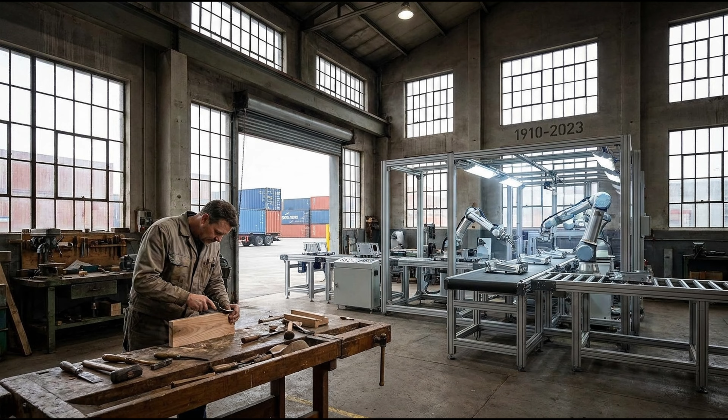The transformation of manufacturing from localized artisanal craftsmanship to globalized automated mass production stands as one of the most consequential economic and technological developments of the modern era. Prior to the Industrial Revolution, the fabrication of complex goods was fundamentally a bespoke, labor-intensive process, relying heavily on the individual expertise of skilled craftspeople. Individual artisans would meticulously shape, fit, and assemble components by hand, using simple tools, resulting in products that were entirely unique, expensive, and devoid of the consistency required for broad commercial distribution.

Early glimpses of sequential production emerged as early as the 12th century at the Venetian arsenal, where laborers produced ships by moving them down a canal, fitting new components at each designated stop to achieve a remarkable output of one completed ship per day. However, the true conceptual foundation for modern manufacturing was laid with the advent of interchangeable parts.

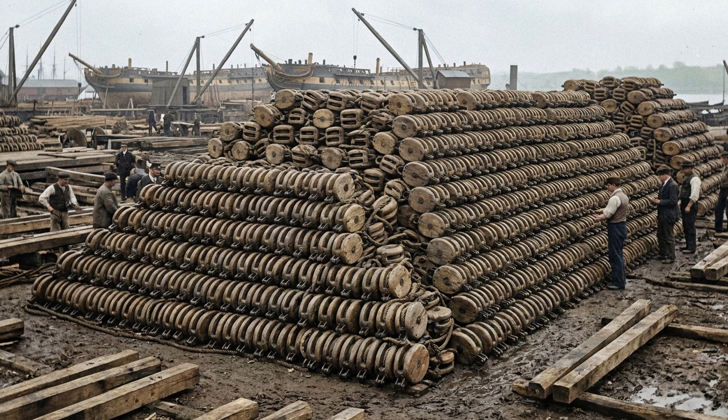In the late 18th century, French gunsmith Honoré Blanc championed the use of standardized firearm components, though his ideas faced resistance from fellow artisans protecting their custom trades. Concurrently, English naval engineer Samuel Bentham applied uniform parts to the production of wooden ship pulleys, but it was Eli Whitney who successfully popularized the concept in the United States, utilizing standardized equipment and unskilled labor to manufacture firearms at scale. These historical precedents coalesced at the dawn of the 20th century to revolutionize the automotive industry.

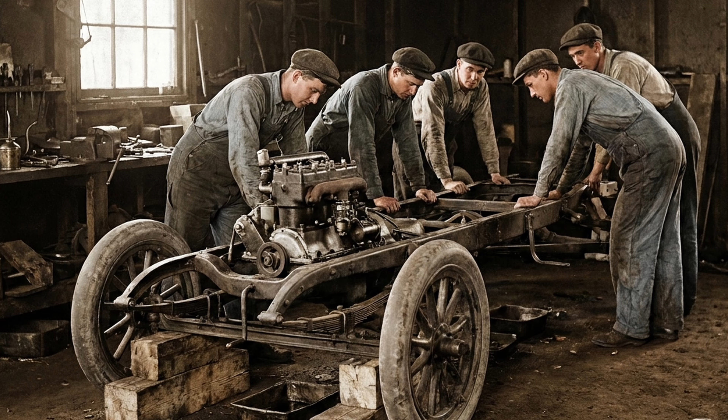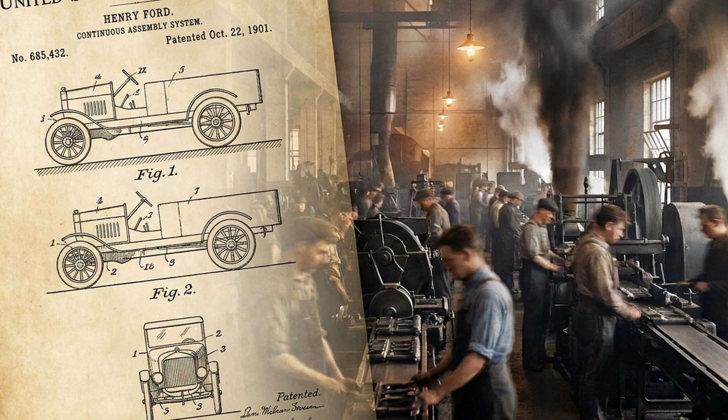In the early 1900s, automobile chassis were typically placed on stationary blocks, and workers carried materials to the cars to assemble them one at a time, making vehicle ownership a privilege strictly reserved for the wealthy. In 1901, Ransom E. Olds patented the first automotive assembly line for his curved dash Oldsmobile, enabling his factory to turn out an unprecedented 20 units per day and increasing overall output by 500% within a single year.

Building upon Olds' methods, Henry Ford introduced the moving assembly line at the Ford Motor Company's Highland Park plant in 1913, utilizing heavy steel rails and motorized conveyor belts to tow the vehicle chassis from station to station. By strictly dividing labor into discrete, repeatable tasks and enforcing a sequential organization of tools and personnel, Ford achieved a staggering increase in efficiency, reducing the assembly time of a single Model T from over 12 hours to a mere 93 minutes. This innovation democratized the automobile, slashing prices and fueling the massive economic prosperity of the 1920s.

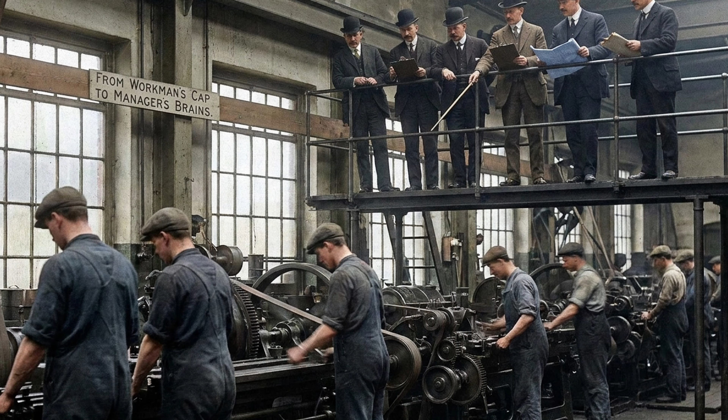However, the extraordinary productivity gains of the early 20th century assembly line exacted a severe and unsustainable human toll. The implementation of scientific management principles effectively stripped the deep, multifaceted knowledge of the skilled artisan from the factory floor, replacing refined mental and manual skills with simple, monotonous tasks repeated endlessly. The comprehensive understanding of the manufacturing process was transferred from the workman's cap to the manager's brains, relegating the human operator to a mere biological extension of the machinery.

Workers were tethered to the relentless machine-driven pace of the line, performing isolated operations such as securing a specific bolt or applying a single weld hundreds of times per shift. This environment fostered extreme boredom and psychological degradation, requiring only minutes of training before a novice was expected to automatize their movements to keep pace with the mechanized belt.

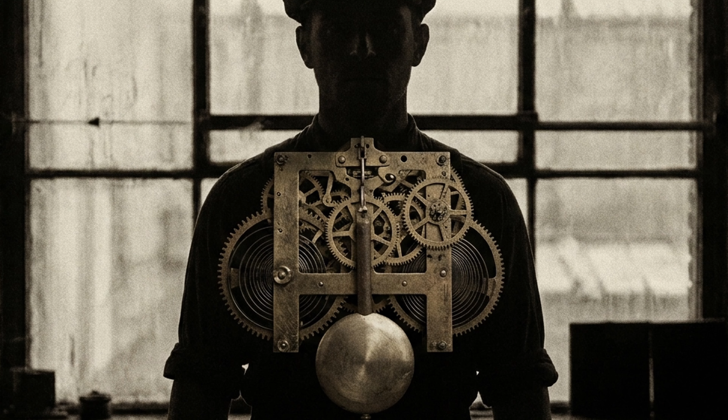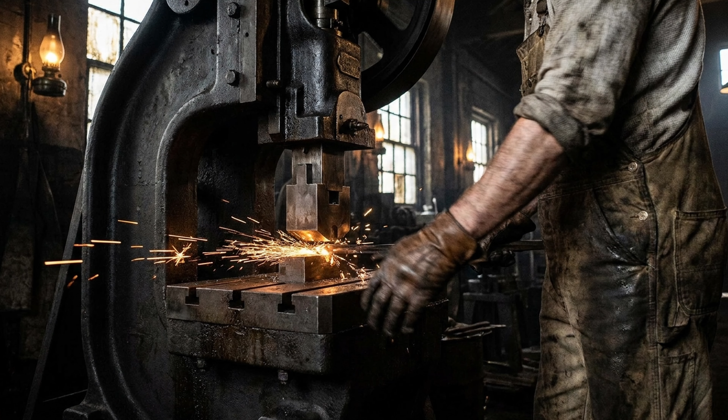The physical demands were equally brutal. The assembly line itself became an unyielding machine boss, operating at terrifying speeds that forced workers to push their physiological limits continuously. Factory managers frequently employed speed-up tactics, arbitrarily accelerating the conveyors alongside stretch-out strategies that doubled up machine assignments to ensure workers were never idle. The resulting work environment was characterized by unbearable line speeds and severe occupational hazards, where laborers operating milling machines, lathes, and punch presses frequently risked catastrophic injury and amputations.

This punishing regime heavily favored the physical resilience of youth. By the time workers reached their late 30s or early 40s, many were physically burnt out and unceremoniously discarded onto the industrial scrap heap by personnel managers who refused to hire older individuals. Despite the famously high wages offered by Ford's $5 plan, the extreme physical exhaustion, the profound psychological monotony, and the rampant exploitation of immigrant labor rendered the human element the most vulnerable and volatile link in the manufacturing chain, frequently leading to a drop in quality, output, and widespread worker dissatisfaction.

Simultaneously, the automated machinery that populated these early factories, while incredibly fast, suffered from severe mechanical rigidity. The pinnacle of early automation was the cam-driven automatic lathe, a technology originating from designs pioneered by Swiss engineer Jakob Schweitzer in 1872 and heavily utilized throughout the 1920s and beyond. These machines relied entirely on fixed physical geometry to govern motion, utilizing a central rotating camshaft. As this main shaft turned, specially profiled metal cams mechanically pushed and pulled an array of levers, linkages, and up to 6 simultaneous tool slides.

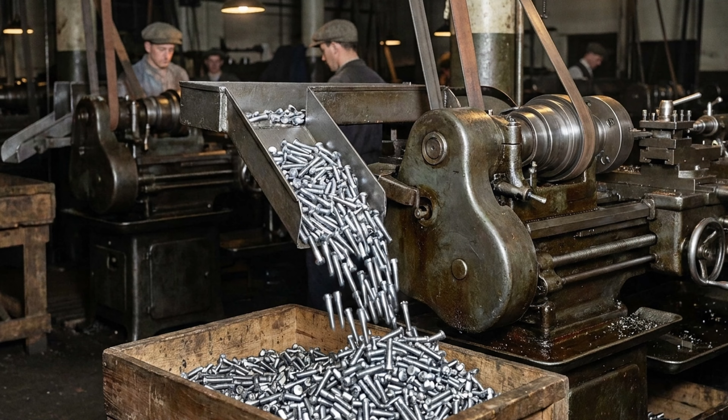The precise physical shape of the cam dictated the exact moment a cutting tool would feed into a bar of raw metal, how deeply it would cut, and when it would retract to allow the part to be parted off. This pure mechanical automation was capable of extraordinary speed and consistency, operating continuously 24 hours a day and completing machining cycles in mere seconds without any manual intervention during the cycle.

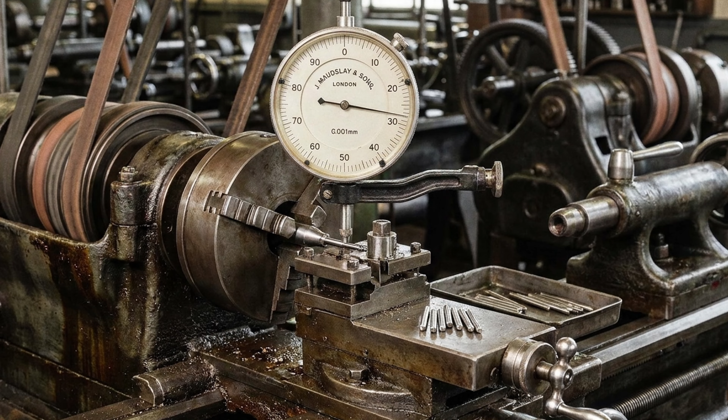Because the motion trajectory was mandated by solid steel rather than vulnerable electronic signals, these machines were immune to network interference, servo response fluctuations, or software glitches, guaranteeing exceptional dimensional consistency with tolerances around plus or minus 0.02 of a millimeter for the mass production of uniform items like screws, pins, and standardized fasteners.

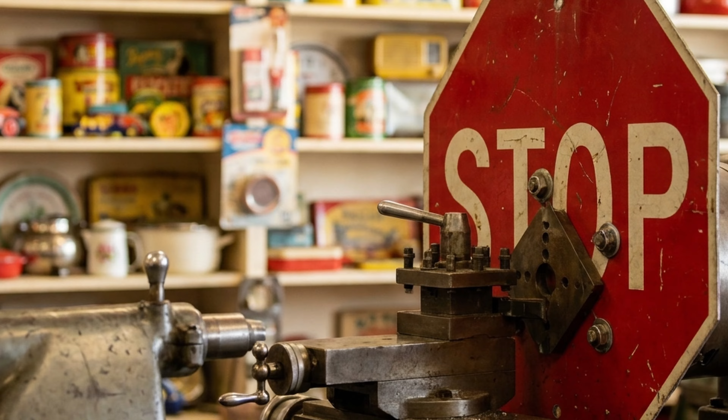Yet this mechanical genius was fundamentally inflexible, representing a massive bottleneck in the face of evolving consumer demands. The geometry of the machine was entirely hard-coded into its physical components. If an engineering design changed, or if the factory needed to produce a differently sized component, the entire machine had to be halted. Technicians were required to physically remove the heavy steel cams and machine entirely new ones with different mathematical profiles, an expensive and time-consuming retooling process.

The automated lines of the 20th century were magnificent instruments of rigid mass production, highly effective for producing millions of identical parts, but entirely incapable of mass customization or rapid adaptation. As global consumer demand began to fracture into thousands of different preferences, requiring factories to switch rapidly between different car models, varying electronics, and customized appliances, the hard-coded mechanics of cams, gears, and synchronized drive shafts became an unsustainable limitation.

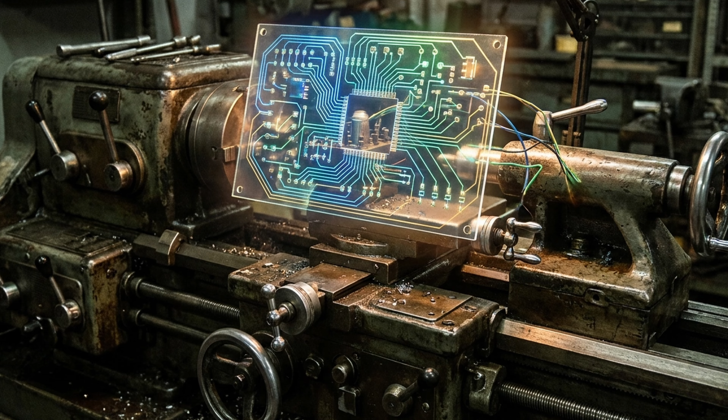A disruptive shift was desperately required to decouple physical motion from fixed hardware, paving the way for the era of programmable digital flexibility and the rise of the articulated robotic arm. The liberation of the industrial assembly line from the tyranny of fixed mechanics began with the conceptualization of the programmable transfer machine, marking the dawn of the robotics age.

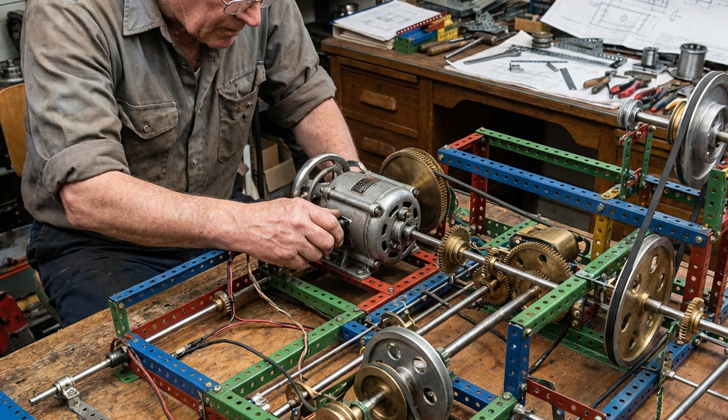The very first known iteration of an industrial robot dates back to 1937, when Griffith P. Taylor constructed a crane-like device utilizing Meccano parts, powered by a single electric motor and capable of automating the stacking of wooden blocks through pre-programmed patterns.

However, the true commercial genesis of the industry occurred in 1954, when George Devol, widely recognized as the father of robotics, filed the first industrial robot patent. Partnering with Joseph F. Engelberger in 1956, Devol formed Unimation, the world's first company dedicated to producing industrial robots.

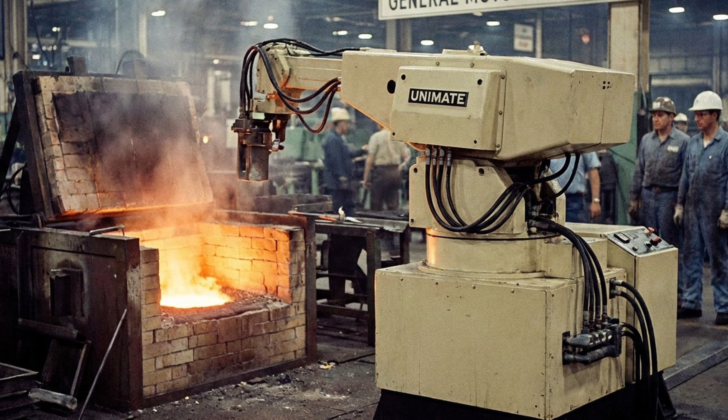In 1962, Unimation initiated the robotic automation of the automotive industry by installing the Unimate robot at a General Motors die-casting plant in New Jersey. These early iterations were primarily utilized for material handling and spot welding, transferring objects within a limited radius of 12 feet. While effective at removing human workers from hazardous, high-temperature environments, these early iterations lacked the fluid dexterity required for complex assembly tasks.

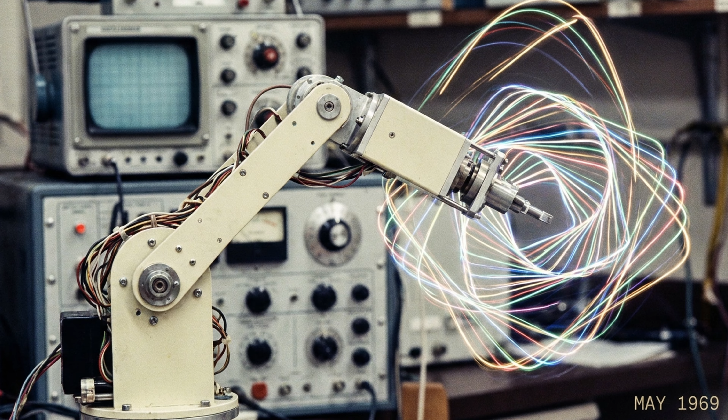The architectural revolution in manufacturing kinematics arrived definitively in 1969 with the invention of the Stanford arm by Victor Scheinman at Stanford University. As the first all-electric, six-axis articulated robotic arm, the Stanford arm introduced an unprecedented level of dexterity and spatial control, expanding the role of robotics far beyond simple material transfer into the complex realms of intricate assembly and continuous path arc welding.

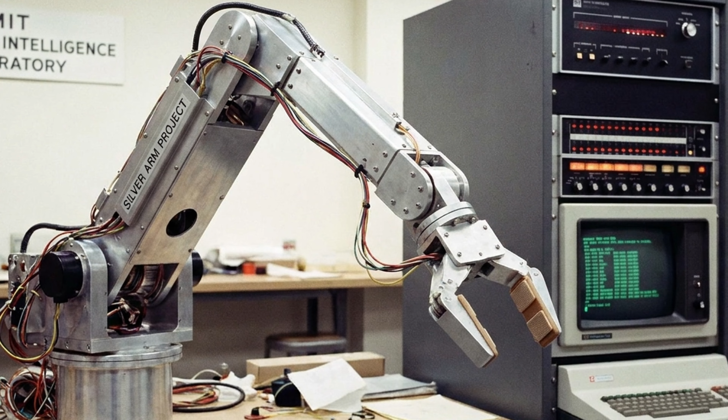Scheinman continued his pioneering work at the Massachusetts Institute of Technology, developing the Silver Arm in 1974, which utilized touch and pressure sensors for feedback control via a mini-computer. He subsequently founded VicArm to manufacture these designs, eventually selling the technology to Unimation, leading to the collaborative development with General Motors of the Puma robot in 1978, which became a ubiquitous fixture in modern assembly line production.

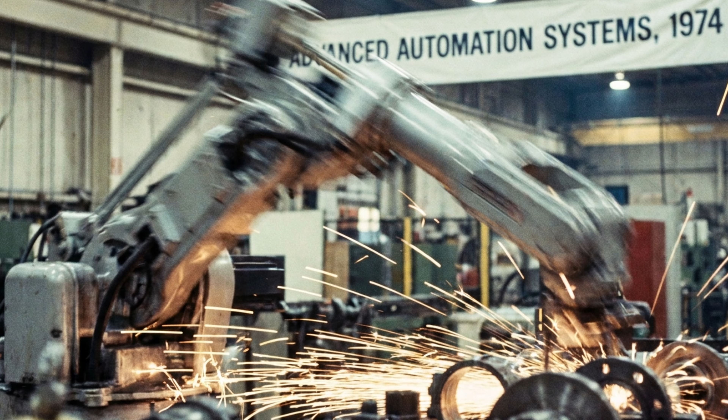The absolute mastery of the modern industrial robot lies in its mechanical architecture, which is specifically designed to replicate and vastly exceed the biomechanics of the human arm. This superlative dexterity is achieved through 6 distinct degrees of freedom, allowing the machine to navigate 3 linear dimensions, x, y, and z, and 3 rotational orientations, roll, pitch, and yaw.

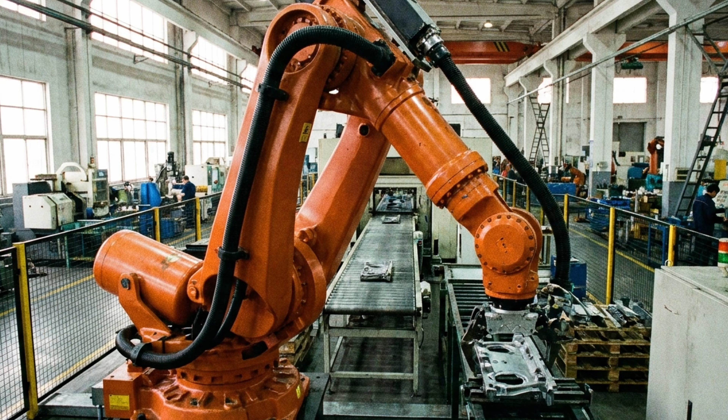The physical structure begins at the robust robot base, which houses the main power conduits, the main control unit, and securely anchors the massive machine to the factory floor. The first axis operates at this base, providing a sweeping side-to-side rotational movement. This joint powers a rotation range that frequently spans greater than 180 degrees from the center point, defining the breadth of the robot's primary work envelope and allowing it to access components situated completely behind its core body.

Above this foundation, the second axis acts as the primary shoulder joint, powering the heavy forward and backward extension of the entire lower arm linkage. The third axis functions as the elbow, raising and lowering the upper arm to dictate the vertical reach of the machine.

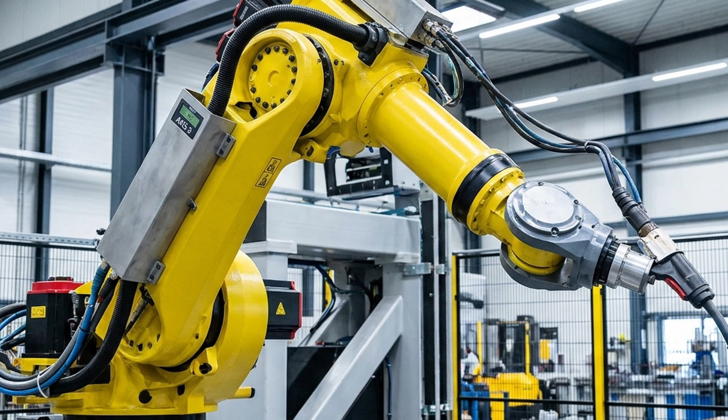In highly articulated models, this joint permits the arm to reach back over itself, drastically expanding the accessible geometric workspace. The true finesse of the 6-axis architecture, however, is localized in the complex wrist mechanism, which comprises the final 3 degrees of freedom.

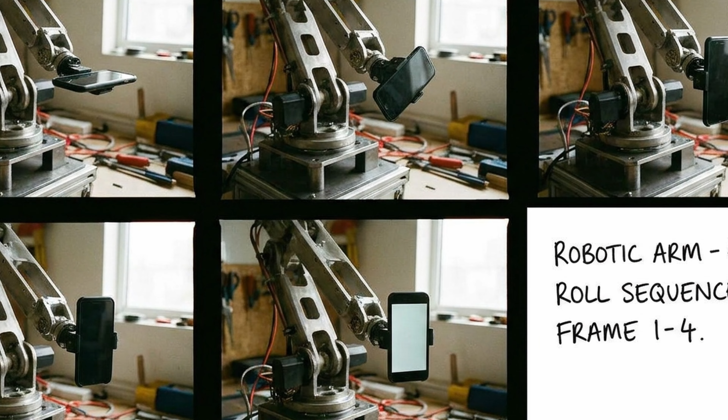The fourth axis rolls the upper arm in a continuous circular motion, reorienting held parts from horizontal planes to vertical alignments, commonly referred to as the wrist roll.

The fifth axis dictates the pitch and yaw, functioning much like a human wrist tilting up and down or swinging side to side on a mechanical hinge.

Finally, the sixth axis rotates the end effector, the specialized tooling attached to the robot, such as a welding torch, pneumatic gripper, or suction array, in a twisting motion that frequently exceeds a full 360 degrees in either a clockwise or counterclockwise direction, a physical feat entirely impossible for human anatomy.

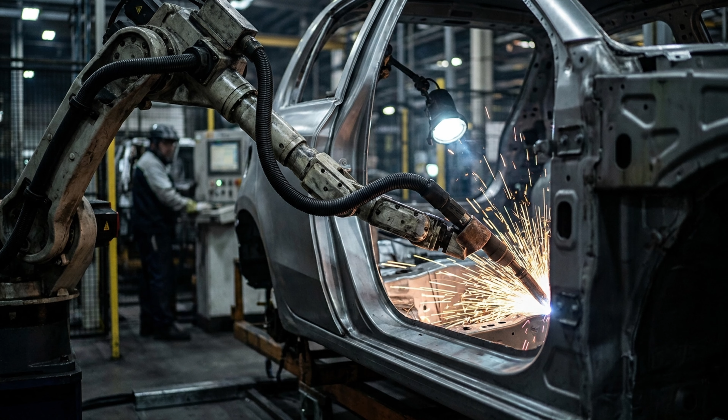This compounding series of joints enables the robot to snake into the confined, structurally complex chassis of an automobile to execute a spot weld in a geometrically restricted space, or to approach a delicate electronics casing from an acute angle without disturbing adjacent microscopic components.

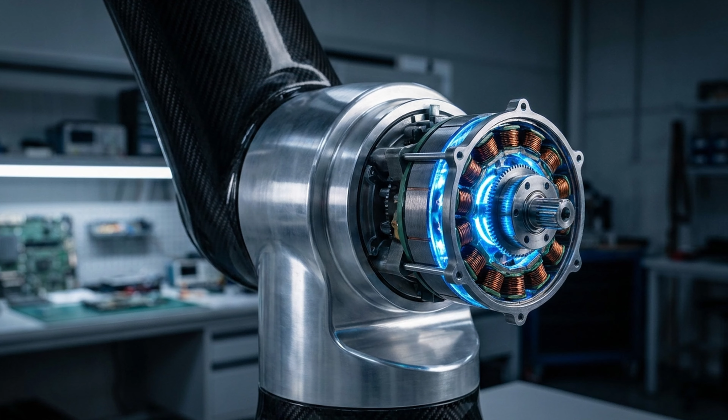Powering these sophisticated sequences of articulation are high-torque servo motors, which serve as the indispensable muscular system of the robotic architecture. Unlike standard induction motors that run continuously at a constant velocity, a servo motor is a highly specialized actuator designed explicitly for exact positional control, velocity regulation, and rapid, powerful acceleration.

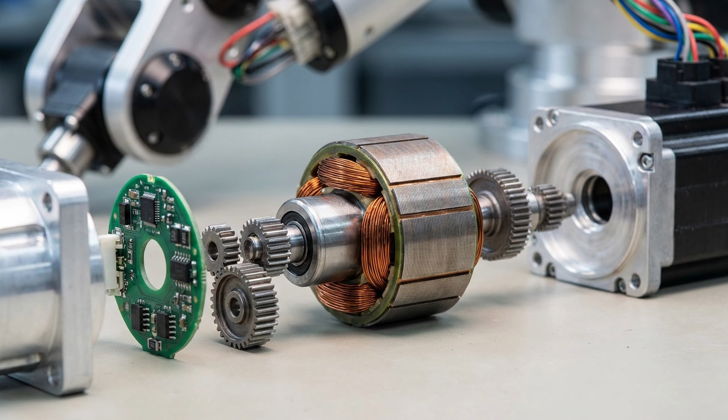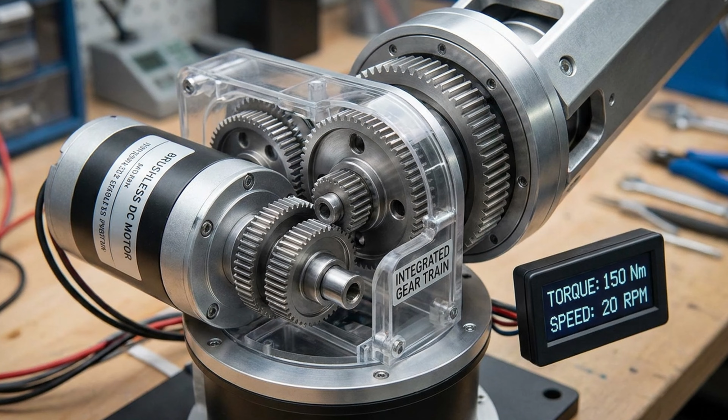The internal anatomy of a servo motor consists of a direct current or alternating current electric motor, a complex gear train, a precision feedback sensor, and a dedicated control circuit. The motor generates the raw rotational motion, while the integrated gear train reduces the motor's high-speed output to vastly increase the torque, enabling the robotic arm to manipulate heavy payloads without sacrificing delicate accuracy.

To achieve the near-zero backlash required for micrometer precision, modern servo motors frequently utilize advanced strain wave gear technology, which minimizes efficiency losses and ensures that when the motor halts, the massive kinetic energy of the robotic limb ceases instantly with zero mechanical slop or vibration.

The fundamental distinction and primary advantage of the servo mechanism is its integration into a highly responsive closed-loop feedback system. Embedded directly within each of the 6 joints is a high-resolution optical or magnetic encoder, or a precision position potentiometer, that continuously measures the absolute rotational position, speed, and trajectory of the motor shaft.

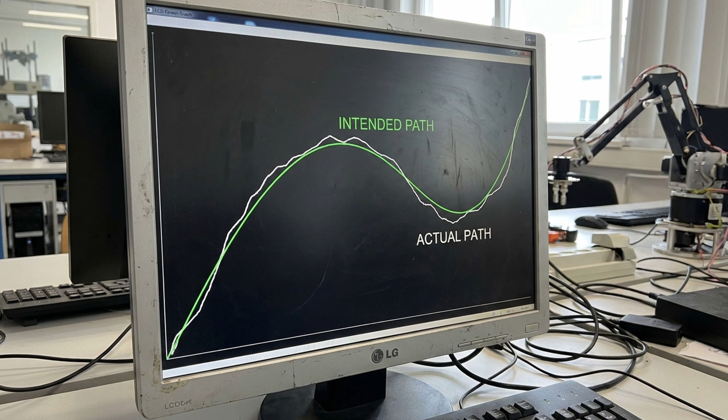This sensor relays high-frequency telemetry back to the robot's central controller, which constantly compares the actual physical position of the robot limb against the mathematically desired coordinate programmed into the software.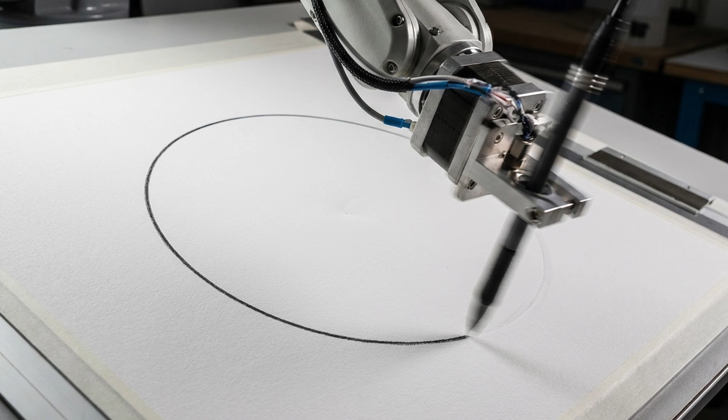If a spatial discrepancy of even a fraction of a degree is detected, the control circuit instantaneously modulates the pulse width modulation signal, injecting precise bursts of electrical current to adjust the motor's motion and correct the trajectory in real time. This continuous microsecond-level cycle of measurement, comparison, and correction is what grants the 6-axis robot its fluid, superhuman precision.

In complex manufacturing tasks, such as continuous path robotic arc welding, the robotic arm must maintain the welding torch at an exact, unwavering distance and angle relative to the curvature of the metal, moving at a strictly regulated velocity to ensure the molten weld pool forms evenly without burning through the base material.

High-torque servo motors provide the immense rotational force necessary to maneuver heavy steel armatures, while simultaneously demonstrating the microscopic delicacy required to halt that massive kinetic energy at a specific sub-millimeter coordinate.

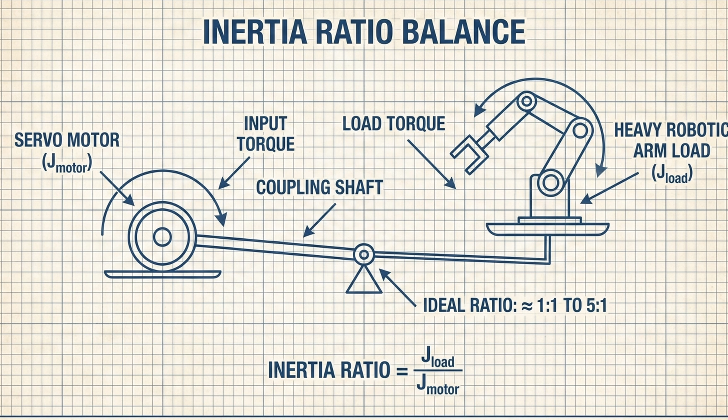Crucially, the selection of these motors requires meticulous inertia matching, ensuring the inertia ratio between the motor and the load falls within an optimal 1-to-1 to 5-to-1 margin, allowing the servo to respond instantly, maintain fluid motion profiles, and avoid unnecessary mechanical stress on the couplings.

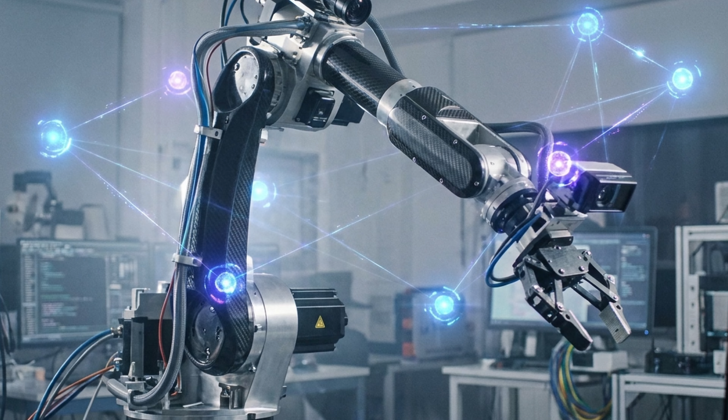Ultimately, this awe-inspiring physical architecture is entirely subservient to the invisible software governing every single millimeter of travel. The transition from cams to code means that the robot's motion profile is no longer a physical artifact carved in steel, but a highly adaptable digital string of waypoints, arrays, and kinematics calculations.

Engineers utilize intuitive teach pendants to manually guide the end effector through a desired sequence, recording the precise angular coordinates of the joints at each step to build an operational program.

Alternatively, offline programming software allows manufacturing engineers to generate complex multi-axis toolpaths directly from 3-dimensional computer-aided design models, translating virtual geometry into actionable servo commands without ever halting the physical production line.

This seamless, instantaneous bridge between digital intent and physical execution is what fundamentally separates modern robotic assembly from its rigid mechanical ancestors, transforming the modern factory floor from a static arrangement of iron into a dynamic, infinitely reprogrammable engine of creation.

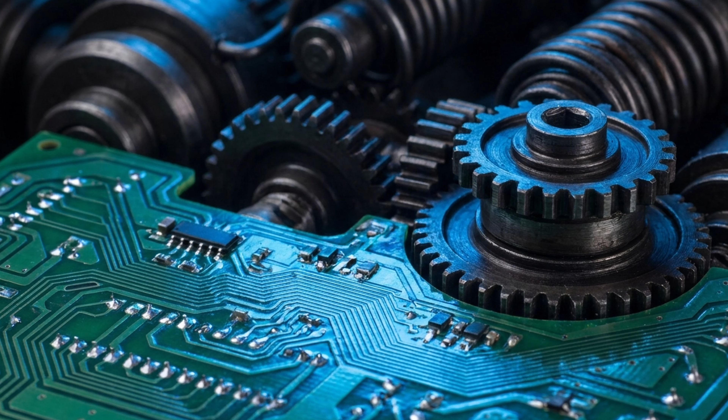While high-torque servo motors and articulated steel structures form the muscle and bone of the modern assembly line, the Programmable Logic Controller operates as the indispensable central nervous system, orchestrating the chaos of the factory floor into perfect operational harmony.

Introduced to the industrial landscape in the late 1960s to replace massive, convoluted, and highly fault-prone cabinets of hardwired electromechanical relays, the Programmable Logic Controller is a ruggedized, industrial-grade computer designed specifically to withstand the severe vibrations, extreme temperature fluctuations, pervasive dust, and intense electromagnetic noise inherent to heavy manufacturing environments.

In its modern incarnation, the controller possesses processing capabilities that rival high-end commercial computers, yet it operates on a fundamentally different computational paradigm that prioritizes absolute determinism, long life cycles, and unwavering real-time reliability.

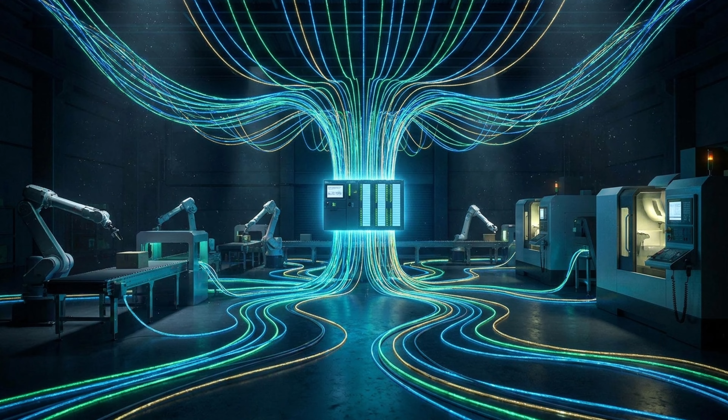The core operational mechanism of the Programmable Logic Controller is the scan cycle, a continuous, rapid-fire loop that serves as the unrelenting heartbeat of the automated factory. In the initial phase, known as the input scan, the central processing unit reads the digital and analog states of thousands of input devices scattered across the assembly line, simultaneously interrogating proximity sensors, optical scanners, limit switches, thermal probes, and safety interlocks.

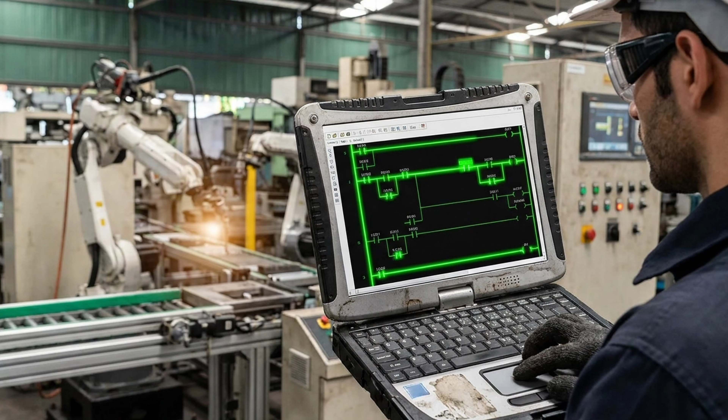In the subsequent phase, the processor executes a user-defined logic program, often written in specialized visual programming languages such as ladder logic, function block diagrams, or structured text, evaluating the fresh input data against a complex architecture of conditional statements, logical contacts, and relay coils.

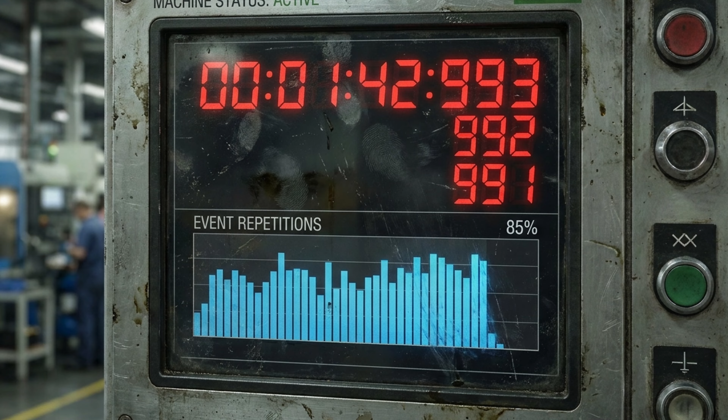This logic incorporates specific timing elements, such as timer on-delay functions that delay an output after an input is triggered, timer off-delay functions that keep an output active after a signal drops, and counters that track event repetitions.

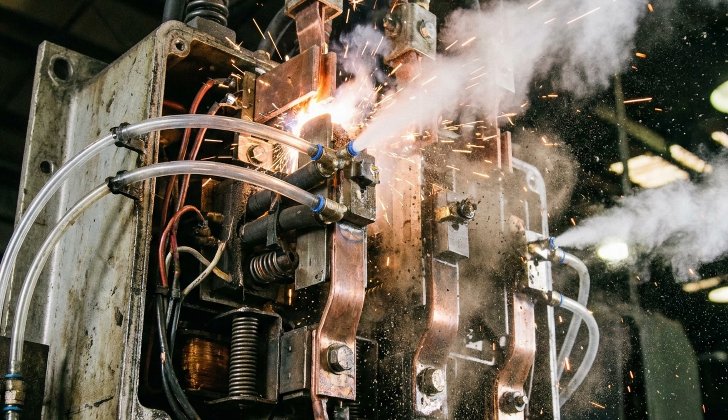Finally, in the output scan phase, the controller updates its output modules, firing precisely timed signals to open pneumatic valves, engage heavy motor contactors, or trigger the robotic arms to initiate their pre-programmed kinematic sequences. The controller concludes with internal housekeeping, managing diagnostics and heavy communication loads.

This entire cycle from perception to cognition to physical action occurs in a matter of milliseconds, and in high-performance applications within mere microseconds. This relentless computational speed and unblinking vigilance effectively eliminate human error from the synchronization of the assembly line.

A human operator may succumb to physical fatigue, momentary distraction, or sensory overload, leading to misaligned parts, skipped fastening steps, or disastrous safety breaches.

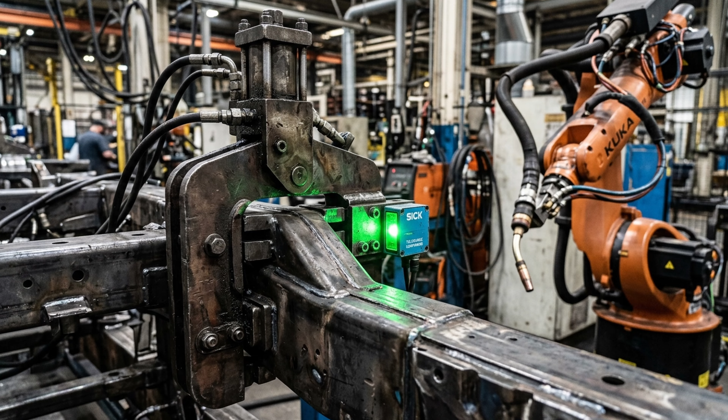The automated controller, conversely, applies its programmed logic identically across millions of continuous iterations. It ensures that a robotic welding sequence will not initiate unless a sensor explicitly confirms that the automotive chassis is clamped to the exact required tolerance and that the previous robotic cell has completely retracted its arms.

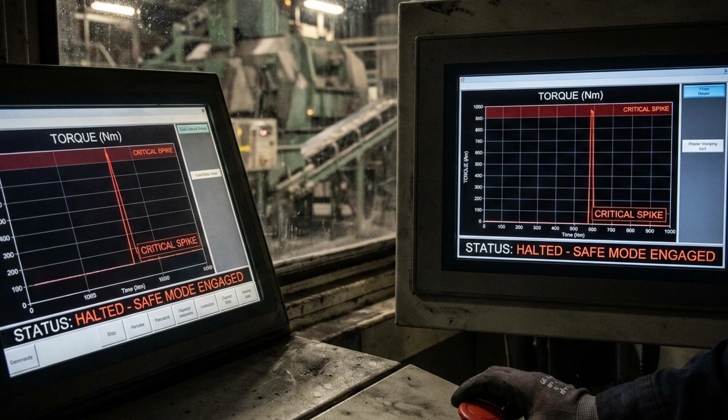If a critical anomaly is detected, such as a sudden spike in motor torque indicating a jammed component, or a broken infrared light curtain signifying unauthorized human intrusion, the controller reacts instantaneously, halting the massive machinery orders of magnitude faster than human reflexes could manage, thereby preventing catastrophic equipment failure, ensuring uncompromising quality control, and safeguarding human life.

The supreme strategic advantage of this computational architecture, however, is its capacity to orchestrate mixed-model assembly lines, representing a definitive disruptive break from the static inflexibility of the historical Fordist era.

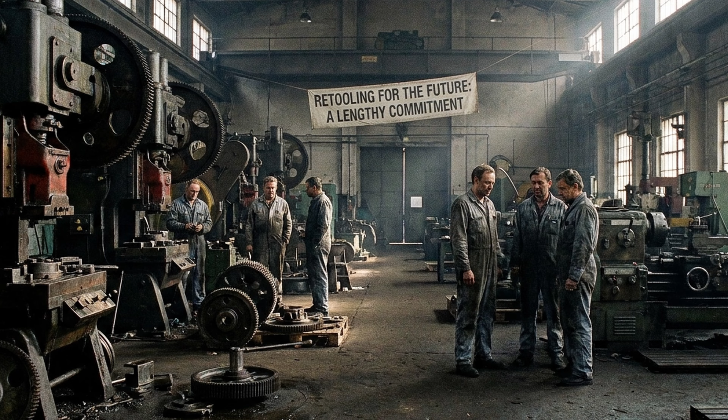In a traditional factory, an entire production line must be halted and extensively retooled to switch from producing one vehicle model to another, costing days or weeks of lost productivity and immense capital expenditure.

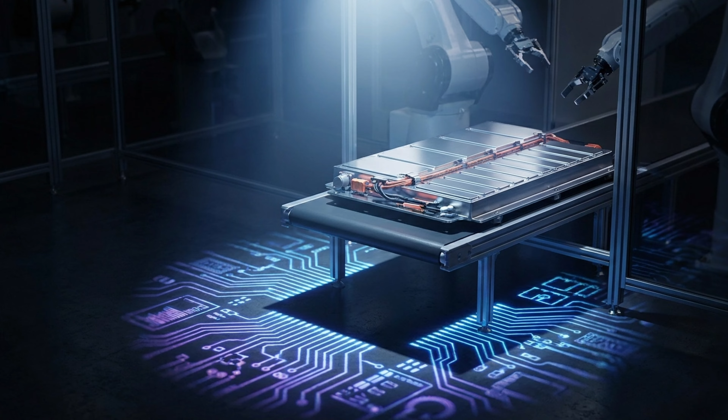Modern automotive manufacturers, exemplified by the radical production optimizations pioneered by companies like Tesla, have leveraged the power of programmable logic controllers deeply integrated with radio frequency identification technology and centralized manufacturing execution systems to achieve instant dynamic switching between entirely disparate products. In these highly advanced environments, the physical component itself dictates the bespoke assembly process it will undergo.

As a bare vehicle chassis, a motor casting, or a sensitive battery module travels down the automated conveyor, it is affixed with a passive RFID tag containing a unique encoded hexadecimal string identifier conforming to electronic product code standards.

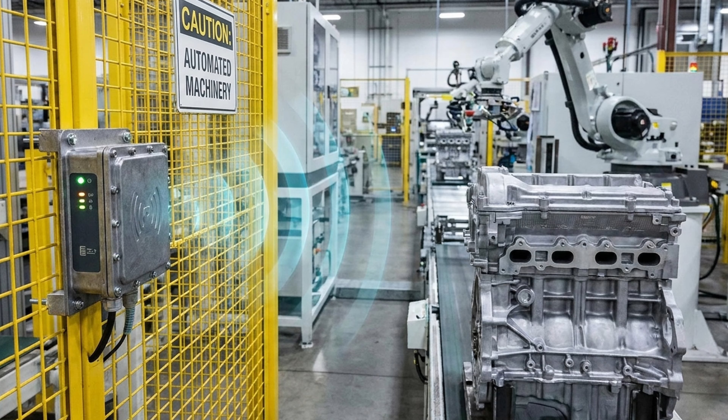As the unit approaches a specific robotic cell, an industrial antenna, such as a Zebra RFID reader connected via localized edge computing, interrogates the tag, decoding the hex string into plain text and bouncing the unique identifier back to the local programmable controller.

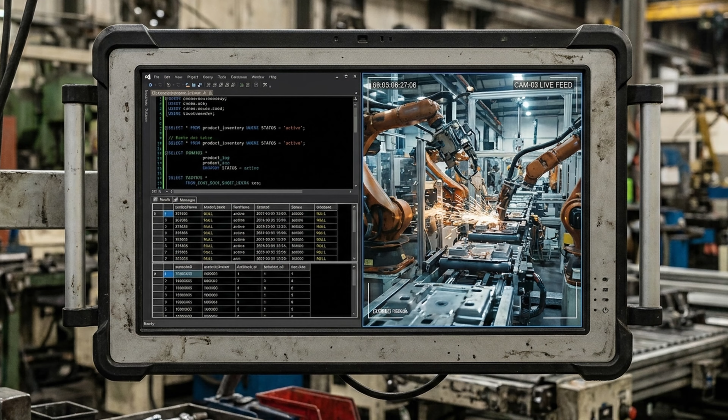The controller instantly cross-references this precise data with the overarching manufacturing execution system, the supreme air traffic controller of the entire facility, which manages production orders, tracks quality defects, and conducts statistical process control using robust Oracle and SQL Server databases. Based on this split-second digital handshake and real-time database query, the controller transmits a specific command to the waiting...

...6-axis robot, instructing it to seamlessly transition from the complex welding program optimized for a compact sedan roofline to the entirely altered geometric parameters required for a heavy sport utility vehicle.

The robot automatically swaps its end effector tooling using automated tool changers, adjusts its spatial boundaries, and executes the newly assigned sequence without the main assembly line ever pausing its forward motion. This network-driven algorithmic agility ensures production bottlenecks are virtually eliminated, allowing the factory to instantly respond to fluid market demands and automatically dispatch the correct parts via warehouse replenishment systems without any manual intervention.

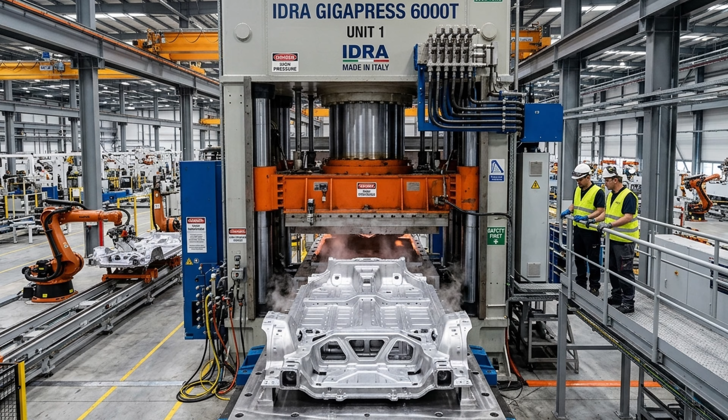This deep integration of operational technology with information technology is further supercharged by Tesla's unboxed process, which utilizes massive presses for gigacasting to mold entire vehicle underbodies in a single piece, eliminating hundreds of individual components and welds, and allowing the factory to build cars in separate modules before a final assembly stage, potentially reducing factory footprints by 40%.

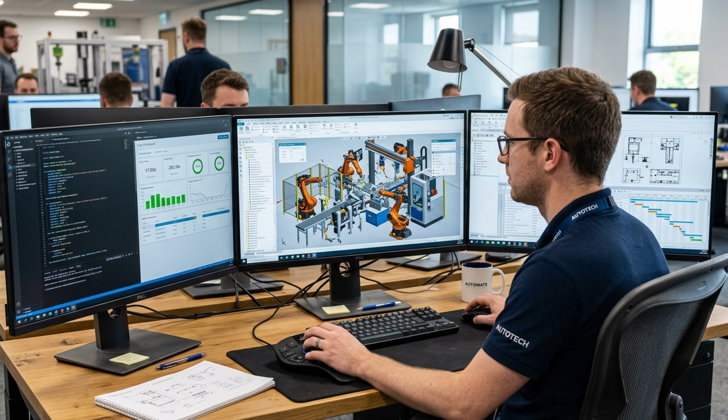Furthermore, the intelligence of the modern factory extends far beyond the physical hardware through the pervasive deployment of digital twins and advanced simulation technologies. Utilizing sophisticated software platforms like Siemens Process Simulate, Plant Simulation, and NX, automation engineers create exhaustive, high-fidelity virtual replicas of the robotic cells and the entire production line, long before any physical metal is bolted to the factory floor.

This process of virtual commissioning allows engineers to meticulously test and optimize the robotic kinematics in a risk-free digital environment, ensuring that the heavy steel arms can reach every required spatial coordinate efficiently without hyperextending their joints, colliding with safety fencing, or creating cycle time bottlenecks.

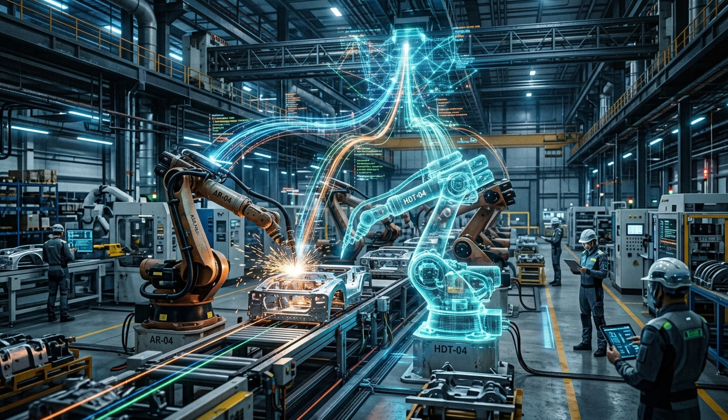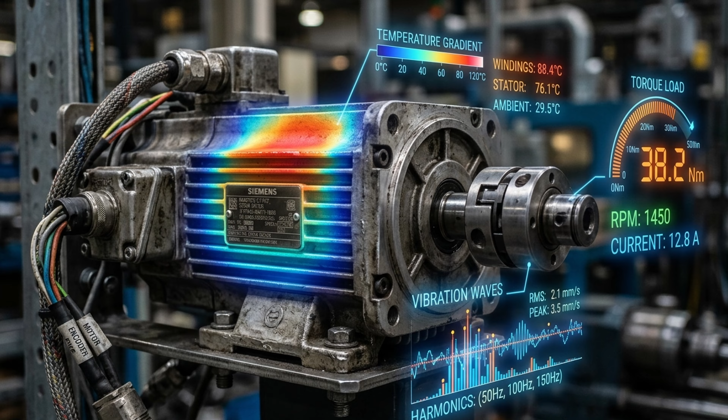As industrial automation surges toward the late 2020s, these digital twins have rapidly evolved from static design validation tools into continuous living performance optimization engines. By synchronizing in real time with the massive telemetry streaming directly from the physical robots, including localized vibration frequencies, motor torque loads, temperatures, and high-resolution encoder feedback, the digital twin utilizes embedded artificial intelligence and machine learning algorithms to constantly monitor the health and efficiency of the machinery.

If a digital twin's pattern recognition model detects an anomalous vibration pattern or a slight misalignment in a robotic arm's second axis, it can predict an impending mechanical failure or a degradation in weld quality weeks before it physically manifests. This allows maintenance to be scheduled proactively during planned downtime, saving millions in avoided defective batches and catastrophic mid-production breakdowns.

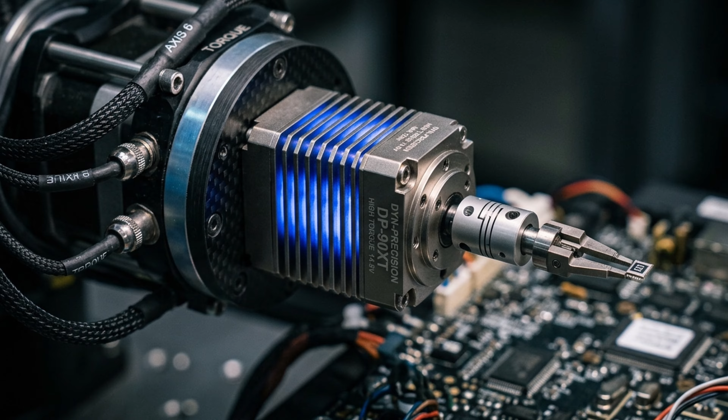Through this continuous closed feedback loop of sensor data capture, real-time cloud synchronization, and AI-driven predictive analysis, the digital brain of the factory ensures that the physical muscle operates at the absolute zenith of operational efficiency, frequently boosting cycle times by 5 to 15%. The synthesis of highly articulated robotics, high-torque servo actuation, and intelligent high-speed control architectures manifests most visibly in the sheer velocity and perfectly synchronized choreography of the modern production floor.

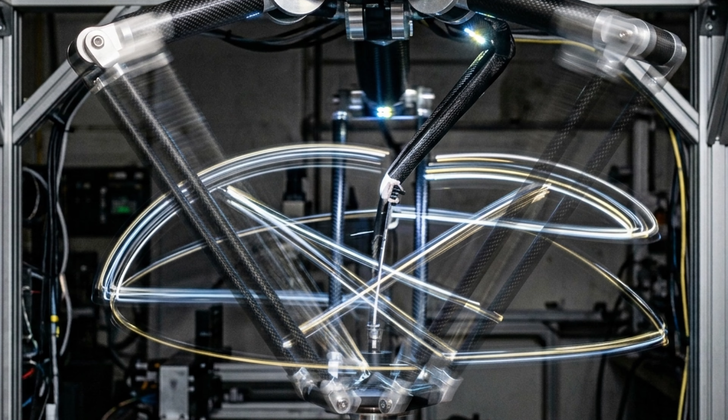Nowhere is this breathtaking speed more apparent than in the deployment of specialized automation like high-speed Delta robots, utilized in continuous pick-and-place applications. Suspended above fast-moving conveyor belts, these lightweight, multi-armed machines leverage the complex geometric principles of parallel kinematics to achieve blistering operational speeds.

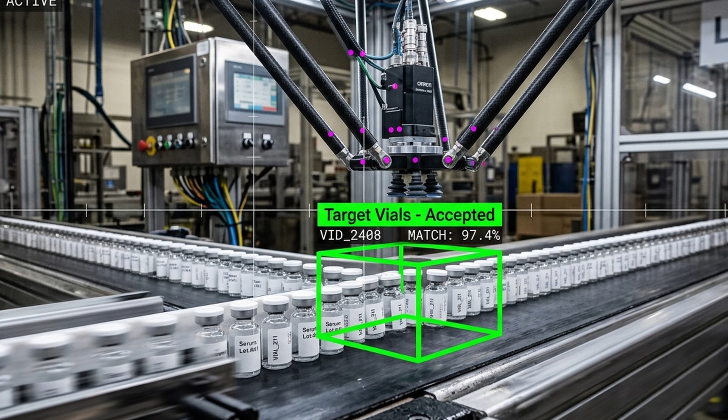Governed by advanced trajectory planning algorithms and aided by integrated 2D and 3D machine vision systems, a Delta robot can identify, target, grasp, transport, and precisely place varying components at phenomenal rates exceeding 200 full motions per minute. To the human observer, the end effector is a literal blur, manipulating delicate electronics, sorting packaged goods, or arranging pharmaceutical vials at a velocity that far outstrips the limits of human visual tracking and manual dexterity.

When integrated with advanced linear transfer systems, such as hybrid cam systems utilizing stop-and-go manufacturing processes that allow for temporary pauses up to 32 stations, this relentless throughput maximizes operational density, allowing factories to output massive volumes of inspected, assembled, and packaged product within drastically reduced physical footprints.

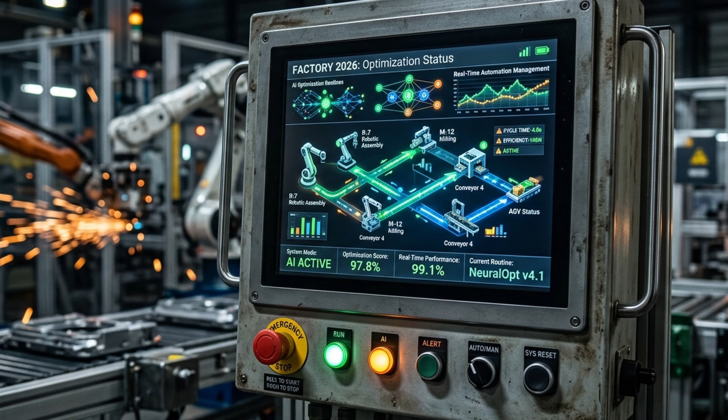As industrial automation pushes aggressively toward the technological realities of 2026, the integration of advanced telecommunications infrastructure is fundamentally redefining how these rapid physical processes are coordinated and optimized. The widespread deployment of private 5G networks and the foundational elements of emerging 6G systems introduces the critical capability of ultra-reliable, low-latency communication to the factory floor.

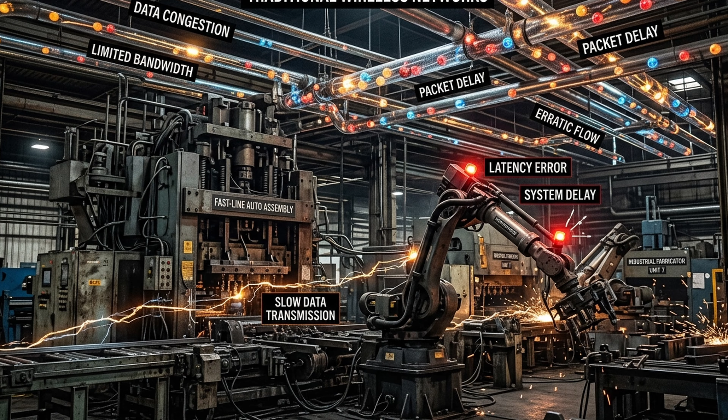Traditional wireless networks, heavily hampered by bandwidth constraints, packet loss, and significant signal latency, were entirely insufficient for controlling heavy, fast-moving machinery, where a communication delay of just a few milliseconds could result in a catastrophic physical collision. The 5G standard, however, provides a seamless, highly deterministic flow of vast quantities of data, enabling instantaneous gigabit-speed communication not just between a robot and a centralized server, but directly peer-to-peer between the robots themselves.

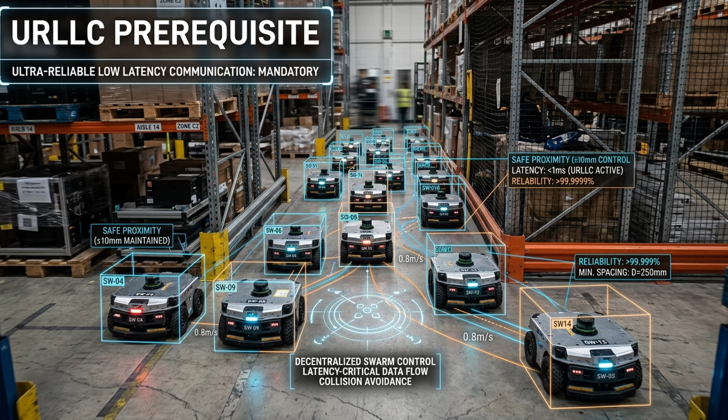This ultra-low-latency networking is the vital, non-negotiable prerequisite for the deployment of industrial robot swarms, decentralized autonomous mobile robots, automated guided vehicles, and collaborative robotic arms operating in tight, highly dynamic proximity. Unlike traditional industrial robots that are rigidly bolted to the floor and strictly sequestered within protective steel cages, modern swarm robotics relies on continuous spatial negotiation to maintain efficiency and safety in environments designed for humans.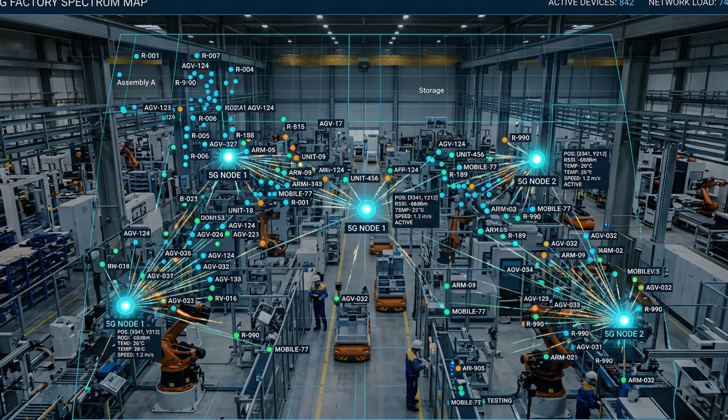Surpassing early bio-inspired algorithms like basic particle swarm optimization, these modern fleets are powered by advanced multi-agent reinforcement learning algorithms, including multi-agent deep deterministic policy gradients and Q-mix-based mixing networks. Operating on lightweight onboard AI deployments and distributed software bus networking like Harmony OS, these swarms continuously calculate and broadcast their positional vectors, sensor data, and intended trajectories over the 5G network.

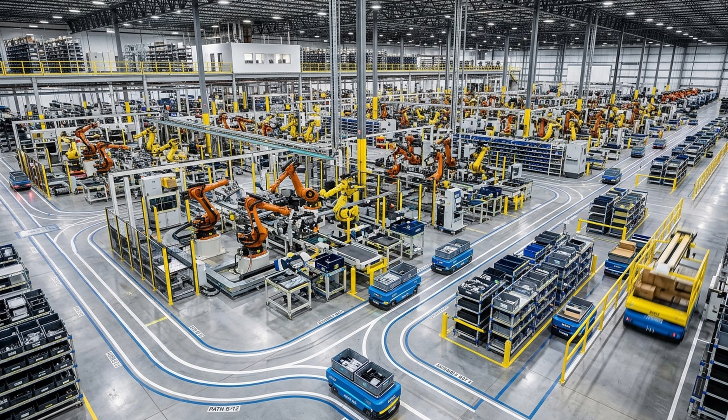By utilizing fuzzy logic inference systems and decentralized actor-critic neural networks, the individual robots dynamically adjust their speeds and routing to avoid collisions, navigate around unexpected obstacles, and maintain optimal formation without waiting for explicit instructions from a centralized server. In an advanced automotive or logistics facility, this translates to dozens of autonomous platforms weaving seamlessly through a maze of articulated robotic arms, delivering specific components to the exact coordinates required by the assembly sequence.

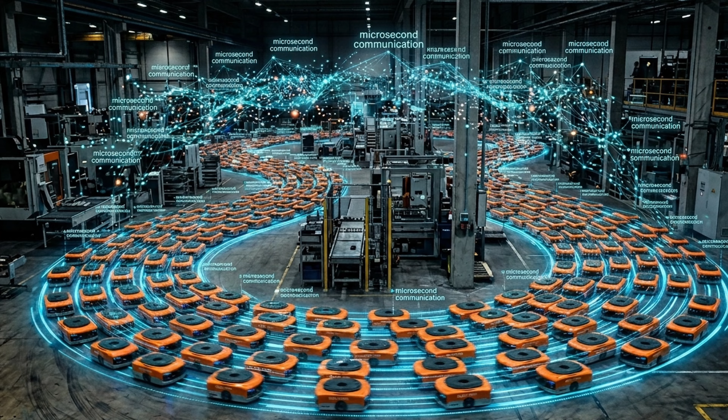Simulated and real-world experiments demonstrate that these algorithms result in smooth, collision-free movement with an astonishingly low average deviation of less than half a meter from moving formation targets, maintaining perfect swarm harmony through continuous, microsecond-level digital communication. Ultimately, the supreme advantage of this synchronized high-speed automation is realized in the massive, quantifiable leap in dimensional consistency and quality control that has become the strict, uncompromising standard for modern manufacturing.

In the realm of industrial arc and spot welding, human capability is fundamentally limited by inescapable physiological realities: muscle tremors, visual fatigue, the intense heat and toxic fumes of the environment, and the inevitable decay of concentration over an 8-hour shift dictate that manual welds inherently suffer from dimensional variance.

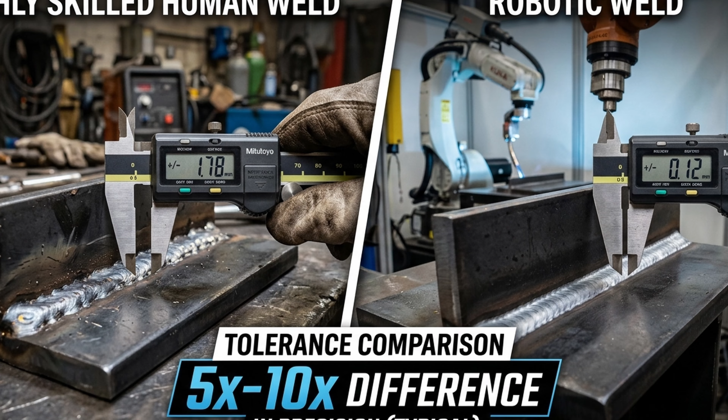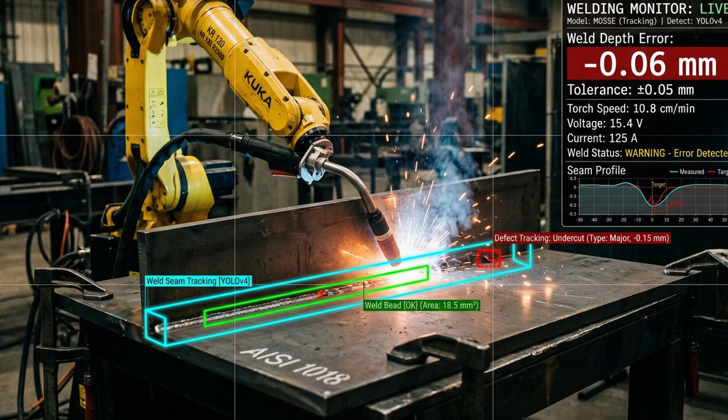Furthermore, the integration of advanced computer vision and artificial intelligence for real-time defect tracking, utilizing advanced models like YOLOv4 and MOSSE, allows robotic systems to identify weld problems with a staggering 97.35% accuracy, achieving weld depth errors as minuscule as negative 0.06 millimeters.

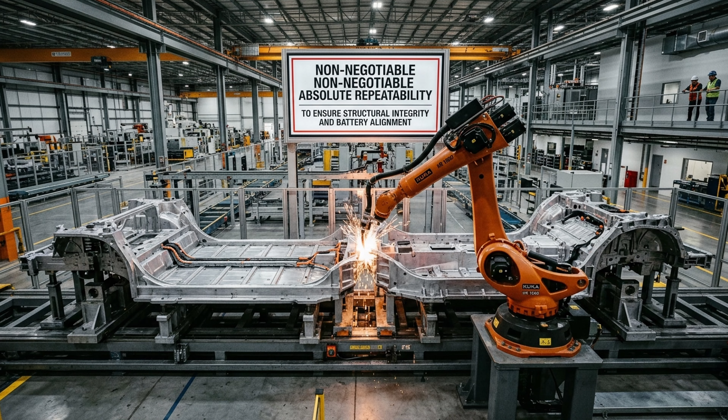This absolute repeatability is non-negotiable in the production of modern electric vehicles, where massive integrated structural components must align flawlessly to ensure the integrity of the vehicle's structural battery pack and aerodynamic profile. If the heavy robotic arms joining these complex gigacastings deviate by more than a fraction of a millimeter, the entire modular assembly process fails entirely.

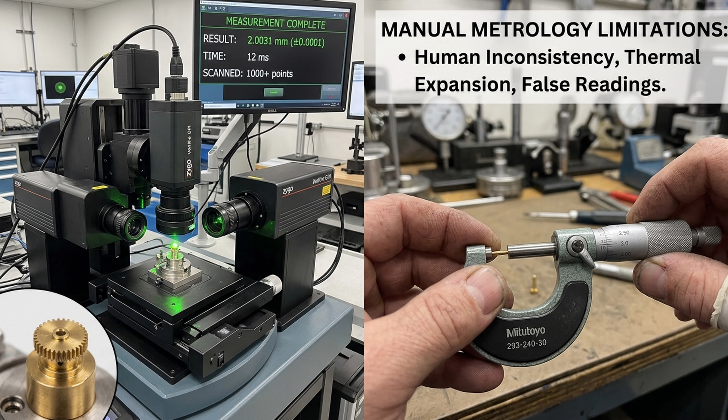This relentless demand for microscopic precision is even more pronounced in the consumer electronics sector. The complex assembly of modern smartphones, wearables, and medical devices requires the manipulation of fragile ribbon cables, the meshing of microscopic gears, and the insertion of densely packed logic boards within aluminum housings, where the available dimensional clearance is frequently measured in micrometers.

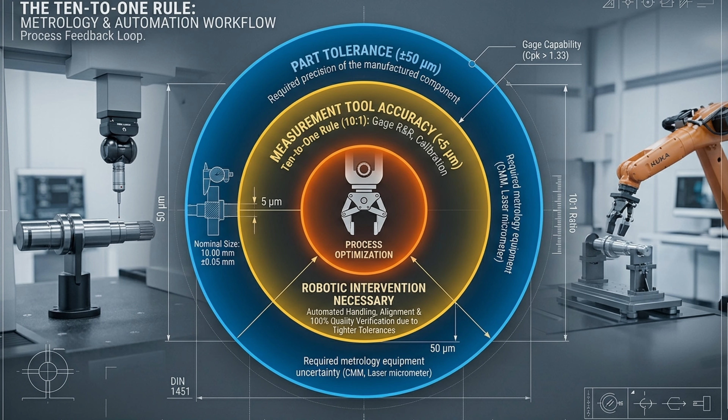Traditional manual metrology methods, relying on manually operated hand tools like calipers, height gauges, and micrometers, are vastly insufficient for the scale, complexity, and speed required, prone to false readings based on slight alignment errors, thermal expansion from body heat, and human inconsistency. Following the engineering principle of the 10-to-1 rule, which mandates that measurement tools must be 10 times more exact than the part's tolerance, the assembly of micrometer tolerance components necessitates robotic intervention.

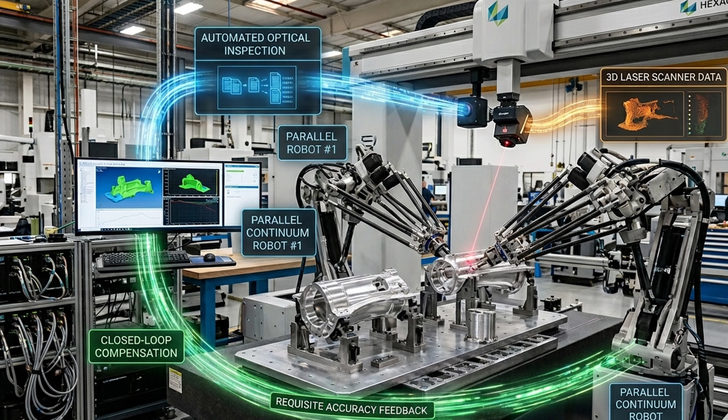To achieve this requisite accuracy, modern factories deploy parallel continuum robots and advanced coordinate measuring machines, integrated with automated optical inspection systems and 3D laser scanners. Driven by high-resolution optical encoders and sophisticated Cosserat rod-based kinematic models, these highly specialized robotic systems routinely achieve mind-boggling positioning accuracies of 3.3 micrometers and orientational precision of 0.5 milliradians, pushing the absolute physical limits of automated positioning.

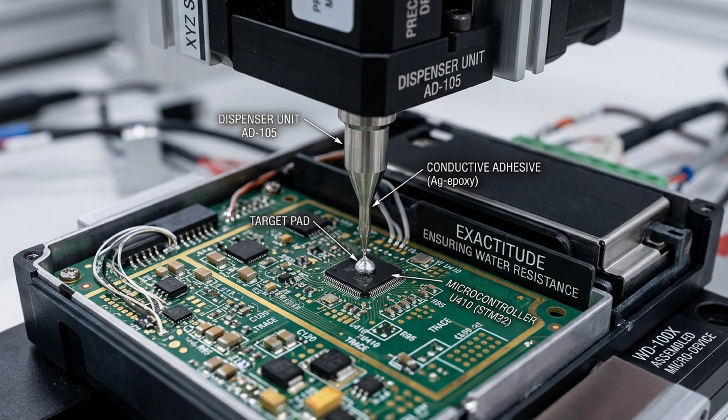Operating well beneath the threshold of human perception, these advanced manufacturing robots execute delicate pin insertions, apply conductive adhesives, thread microscopic nuts, and fasten micro screws with an exactitude that ensures every single device off the line meets impenetrable standards of water resistance and internal durability.

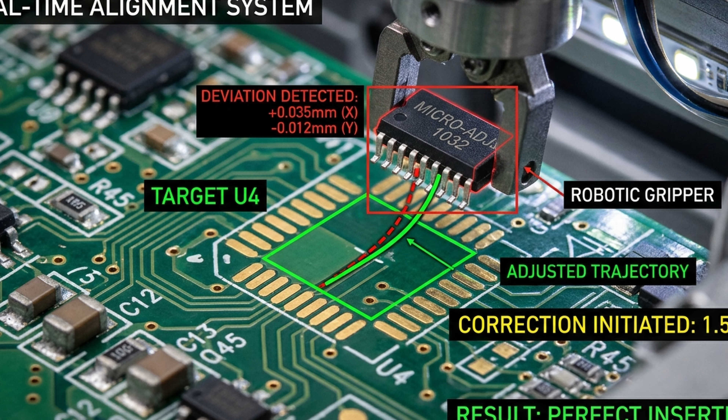When an inline automated metrology system detects a dimensional variance in a supplied component, the software communicates directly with the robotic arm in real time, instantaneously adjusting the insertion trajectory to compensate for the deviation, completely avoiding the production of scrap and ensuring that production never halts.

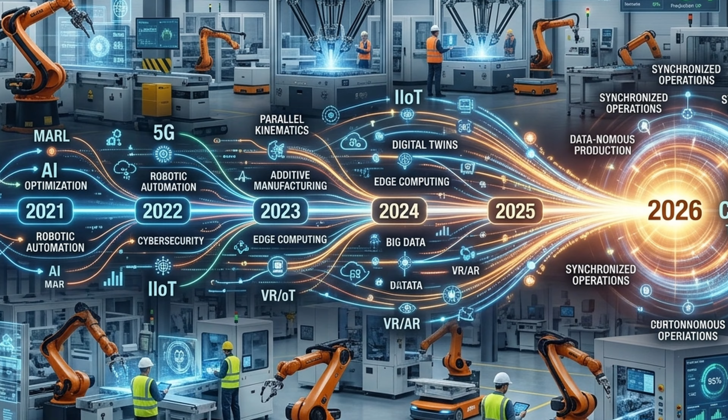Through this relentless, accelerating convergence of highly articulated steel, microsecond-level logic processing, pervasive telecommunications, and predictive digital networking, the contemporary factory has entirely transcended its historical origins. The dark, dangerous, and mechanically rigid assembly lines of the early 20th century have been thoroughly dismantled.

In their place stands a highly choreographed, exceptionally intelligent ecosystem where digital flexibility drives physical motion, achieving a symphony of speed, autonomous adaptability, and micrometer precision that defines the absolute pinnacle of modern industrial capability.